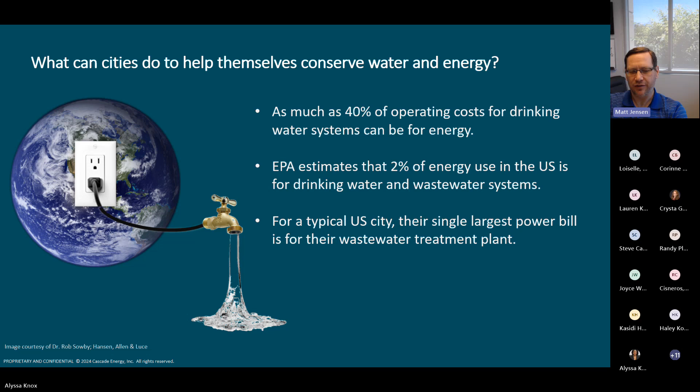So go ahead, Alyssa. So unaccounted water. Unaccounted water is water that you produce for your water system, but when you add up all the water delivered to your residents and their businesses, there's a difference, and that difference is unaccounted water. So when the fire department does testing on your hydrants, that's unaccounted water. That water doesn't end up being paid for by residents.

When you do routine line flushing, or sometimes cities have bulk water sales for construction or for dust reduction type things, and sometimes those bulk water sales are managed without metering the connection. And then I do come across a not insignificant number of cities that don't meter the water they use for city landscaping and parks. But typically unaccounted water, when we talk about that, we're talking about leaks.

This is an example I just pulled off the internet of a leak. I do not have rights to share that image, so hopefully there won't be any repercussions from that. It was a massive leak, obviously, and this is one that wherever this is they would respond to. In addition to large leaks like this that surface and your crews go out and fix, there are thousands of leaks of smaller magnitude that don't get reported. They don't surface. They just end up going into the water table, and you never know or see.

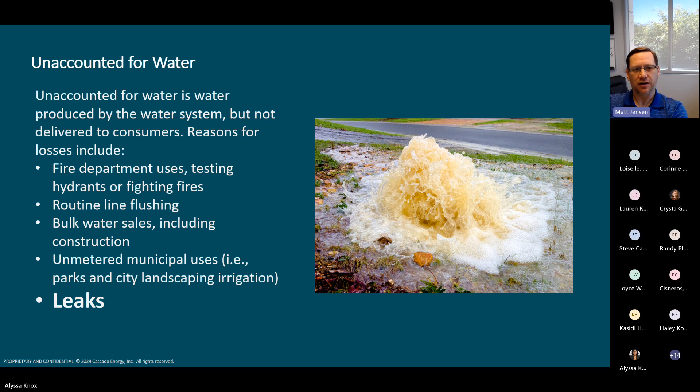And every system in Texas reports to the state every year about their unaccounted water percentage. I went and found the website where that resides. I spent way too much time compiling data, but once I got started, I couldn't stop. So on the next slide is a breakdown of the self-reported unaccounted water percentage for the cities only. I didn't include the water agencies, just the municipal cities that have reported to the state.

These are the percentages. The best I saw was a 2.5% unaccounted water percentage. The worst was just under 44%. That's a pretty big number. But mostly you were distributed between 8 and 12%, or 8 and 14%, was where the breakdown was. Now these numbers are very dependent upon the accuracy of your flow meters.

Leaks happen, and they're always going to happen. When I see numbers around the 2.5% mark, I typically think that's probably a reporting error. Most systems aren't going to get that good, but that 8, 9, 10% range, that's kind of the sweet spot. That's what I think a reasonable system that's staying on top of this can achieve. And if you don't know what your unaccounted water percentage number is, then you should do a little digging. Talk to your public works director or whoever's submitting that number to the state, find out what your number is for your city, and then see what you can do to make it better, if possible.

I'm certainly not advocating for any of them, but there are third-party companies that will come out and, using listening, will help find leaks and help quantify what those might be. I know there's some satellite usage now that looks for chlorine residuals in water that's just under the surface, and that can help point to where there might be leaks. But regardless, I think the important message here is that water loss is energy loss.

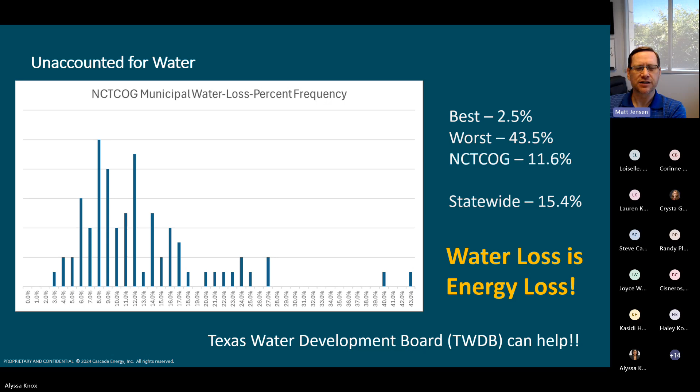I guess Q&A is at the end, so we'll move on with other stuff around this.

But the other side to losses, to leaks, has to do with your water pressure. So this is the same pipe. Obviously, one is at high pressure and one is at almost no pressure. You can see a little bit of water trickling out there in the picture on the right, but it's the same cut. And so for water systems, typically there's a sweet spot in the pressure that arrives at your residents' homes, somewhere between 45 psi on the low end and up to about 100 psi on the high end.

The higher your pressure is in your system, the more water is lost when you do have leaks. And I've seen systems where the pressure is substantially higher, like up into the 150, 200 range. And that can be not only dangerous to your crews and to your residents, but it results in a whole lot of losses when leaks do occur. You get more leaks, and when leaks do happen, you lose more water.

I've got a case study. This is a city in Utah that we worked with. I live in Utah. This is actually the city. Go ahead and advance this if you would, please.

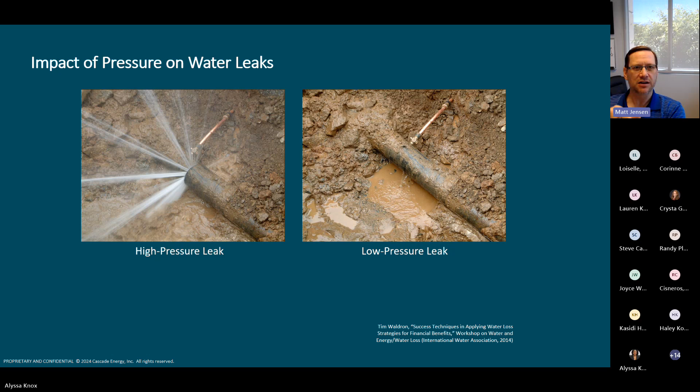Logan City, they've given us permission to share their story. Logan is where my grandma and my mom grew up. My grandma had a house there, and it's where Utah State University is. They've got a number of deep wells. They've got a spring, and I thought they treated water coming out of the canyon as well, but maybe not.

Anyway, regardless, they approached our partners, our aqua efficiency partners. They were looking for another transmission main because they were having a hard time. Go ahead and advance one. In the summertime, they were having a hard time staying on top of water. Their wells are in the bottom of the valley. Their terminal tank is up on the hillside above Utah State.

If I didn't have kind of the picture blocked out in the back, you might be able to see it on the hillside. Right about behind the word main line is where that terminal reservoir is. They're having a hard time keeping that terminal reservoir in the summer, so they thought, well, we need another main line from where our wells are up to the hill. They were having substantial main breaks, over 300 per year, high pressure.

At my grandma's house growing up as a kid, I had to have someone else fill a glass of water for me because the water came out of the faucet so intensely that it would knock the glass out of my hand. And taking a shower at grandma's house was an experience. It was really intense. So they reached out to our partners, and the partners said, well, let's do some analysis of your system before you throw the cost into putting a main line in. So let's advance one more.

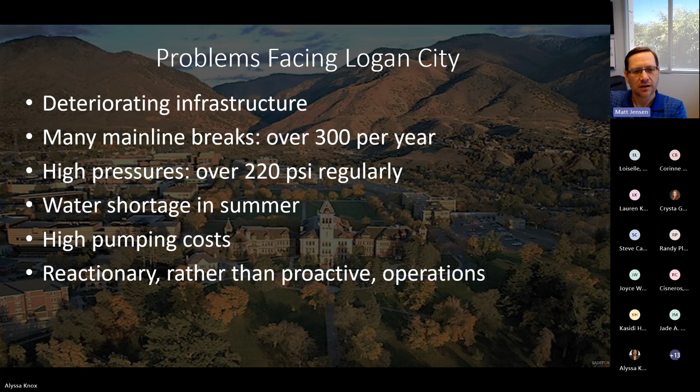This next slide is a hydraulic model that you're looking at. It shows all the nodes in their system. And there's that kind of red dot right there that's flashing. That's one of their wells that they would use to fill the terminal tank, which is represented by the T up on the hillside on your right. They thought when they turned that pump on, the water would go up that direct line straight to the terminal.

But when we did a simulation in their hydraulic model of where the water was going, what they found was the water wasn't going uphill at all. There were demands in the system below, and it was getting pulled downhill, and that was part of what the problem was. And so the solution they ended up doing in Logan, if you advance one slide, is they split their water system into two pressure zones, about where that purple line is. And they created a higher pressure zone and a lower pressure zone.

The lower pressure zone now is closer to that 45 psi to 100 psi range, and the hillside is also about that 45 to 100 psi range. And so now when they turn that well on, which we did simulate, the water actually goes uphill because the water is staying in the zone where it's intended.

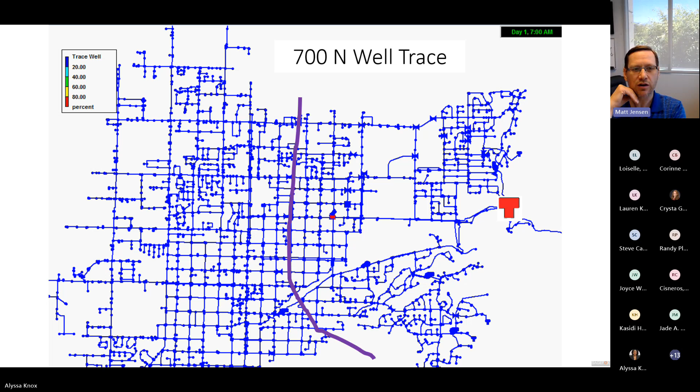And so if you're a system that's mostly flat... if you've got a hilly system, you're probably already on top of multiple pressure zones. But if you have complaints from residents that when they turn the water on, it comes out intensely, or they've got regulators in the house failing, you might have a situation where you have high pressures, and that might be something to look at. But let's advance a slide and we'll see the result from them.

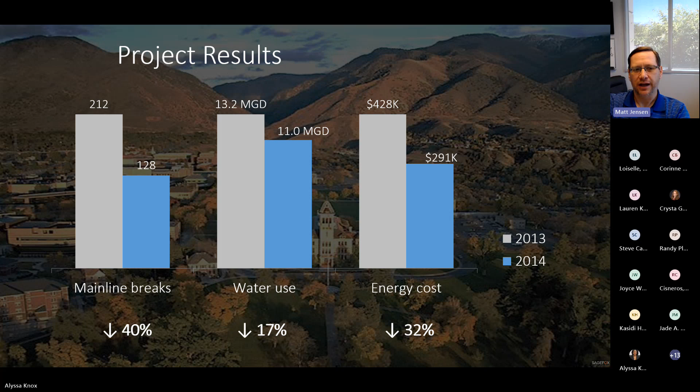Even though this was not an energy or water saving project, it was a water delivery project, they found that after they divided the pressure zones, their main breaks dropped by 40%. The water use in their overall system dropped by 17%, and their energy use dropped by 30%. And that was simply because they were losing less water, they had less pressure, the system was safer. I think there's one more slide on Logan.

Yeah. So less water wasted with less money wasted. They had fewer complaints. It was safer for their crews. This was a handful of years ago. That project would probably have been a $3 million transmission project now. And they postponed the construction of a new water source simply by using their water more smartly.

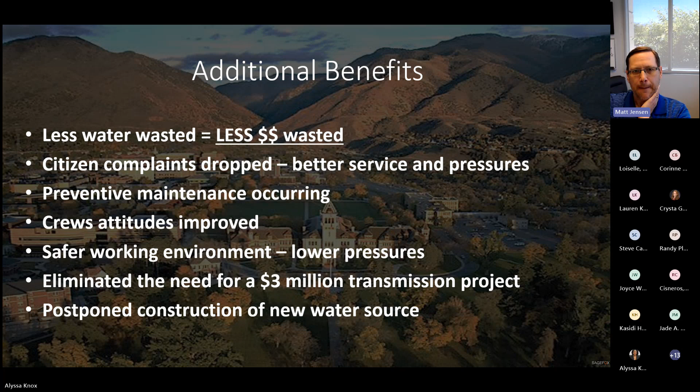Another thing I wanted to talk to you about, and the next slide, is source selection. This is an area of huge opportunity for cities. So maybe you guys can consider in your own systems, how many water sources do you have? How much energy does it take to produce 1 million gallons from each of them? You might in your system have deep wells.

You might have some shallow wells if you're close to a surface water source. You might have treated surface water that you deal with. You might have bulk water that you hire or that you purchase. Each of those is going to have a certain amount of energy embedded in it, or you will be embedding that energy into it to get beneficial use out of it.

And calculating the kilowatt hours per million gallons from each of those sources is a really useful way to make intelligent decisions about how you source your water. And without that information, the question maybe is, how are you currently prioritizing your water sourcing and why?

And I promise you, your operators have favorite water sources. They have favorite wells, they have favorite boosters. I don't know why they pick them, but they do. And without other outside guidance, they're going to use those sources. And sometimes those sources are not the most efficient. So I've got a couple examples for you.

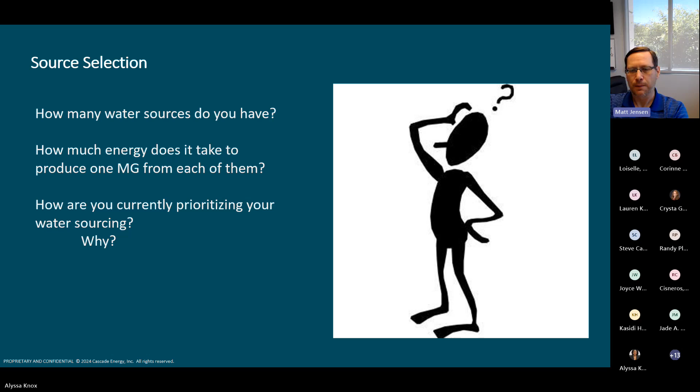This is a wholesale water supplier, Jordan Valley Water Conservancy District. We did this exercise for them, and you can see there that their best water source was their large water treatment plant, Jordan Valley Water Treatment Plant. Compared to their most intensive wells in Carol Way and Solena Way, that's like a 20x difference between their cheapest water source and their most expensive water source.

But some of these most expensive water sources, energy-wise, were their newest wells. They dug these deep new wells. They had shiny, high-efficiency motors, high-efficiency well pumps. But the reality is they had to lift the water a long ways to get it to the surface, to get it to a pressure where they could use it.

Whereas the water flowing into the Jordan Valley Water Treatment Plant mostly came from gravity-fed sources. It mostly fed out of that plant through gravity. It was a very efficient water source. It was a surface water treatment plant. And so they hadn't really considered the ramifications of that.

But once we showed them these numbers, they shifted their water production largely to their two water treatment plants and away from their wells, and they reduced their energy use by 19% in the first 2 years, which is a huge benefit. And these are comments from them. We had them in quotes, so presumably someone on their group said it.

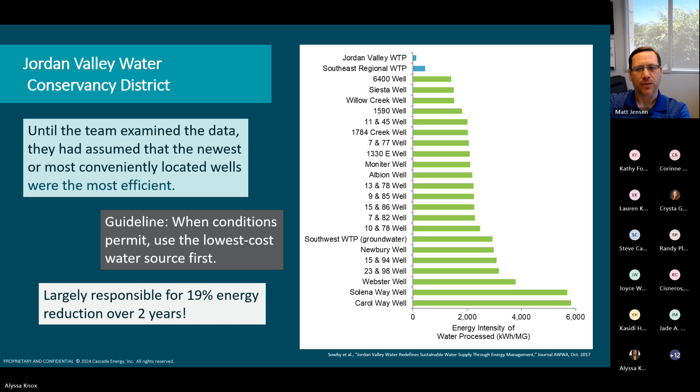Let's go to the next one. Alyssa mentioned we've been working with San Antonio. This is SAWS. This chart is going to show up in their energy strategy master plan. It was presented at the first month of this year, and it was approved by their board. It is public record, but because it's not available on a website yet, I kind of blocked that out. If you squint, you can probably make out the words, but these are real numbers from them.

We did this exercise for them; they've got 9 water portfolios. The Edwards is the Edwards Aquifer. That's where most of their infrastructure is. And they've been spending a lot of money diversifying their water source, because the Edwards Aquifer is in a drought situation right now. The water's not available, and San Antonio's made agreements that they will reduce their dependence on Edwards first, so that other communities can use it longer.

But you can see that on an energy intensity basis only, it is much less than their most intensive sources and better than any other source. And then when you consider their infrastructure investment as a sunk cost, and you just look at the dollar cost per million gallons, it is hands down their best source.

So this raised a lot of eyebrows when we presented this to San Antonio's operating groups, because they had been really working on trying to bring in these other sources, and they'd committed to large amounts of water from some of these more energy intensive sources. And in many cases, there's not a lot of flexibility on what they can do, but at least now they know the numbers. They can make decisions on how they source their water.

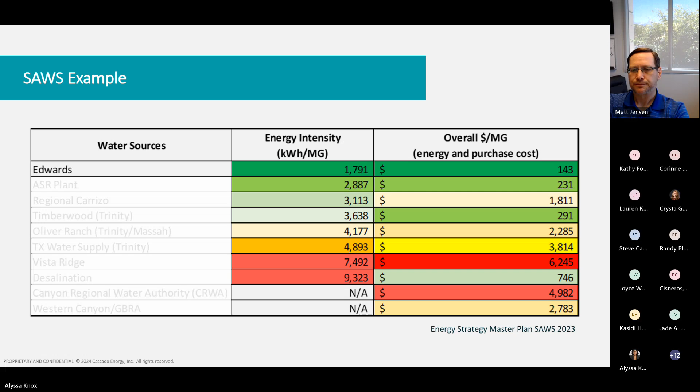And when they get to the slow times of year for demand, they can try to use the sources that will require the least amount of energy and the least amount of money. I've got two more examples. One's from Yakima, Washington. The other one is North Salt Lake. Alyssa mentioned that I was on the city council. That's where I was on the city council, is North Salt Lake.

So this first one, those animations go fast, but there were some animations that would lead into this slower. But anyway, this is a Nob Hill Water Association. They gave us permission as well to share this. They source their water from Zone 3. Well, they've got wells in Zone 1 also, but one of their best wells is in Zone 3, and they source more water in the Zone 3 pressure zone than they can use.

So what they had been doing was lowering all the water down into Zone 1 and then boosting it into Zone 2. And the reason they did that is because they wanted to be able to adjust the levels in the water tank in Zone 2 and make sure that the water age didn't get too old, that they had good chlorine residuals. But that meant that every drop of water that went into Zone 2, they had to boost, whereas they could have gravity fed it from Zone 3 because they had a valve already, the valve on the left, but it wasn't a smart valve. They couldn't control the flow.

Anyway, they ended up tweaking that valve to get part of the flow through that valve, and part of it they still boost, but they've got a long-term plan now to put a control valve, which I've indicated on the right, that they can actually open and close to simulate what they're getting from their booster pump and still make sure they have fresh, good water in Zone 2, but not have to boost it from Zone 1. This, in addition to a focus on reducing their overall leaks, saved them about 10% of their energy use on an annual basis.

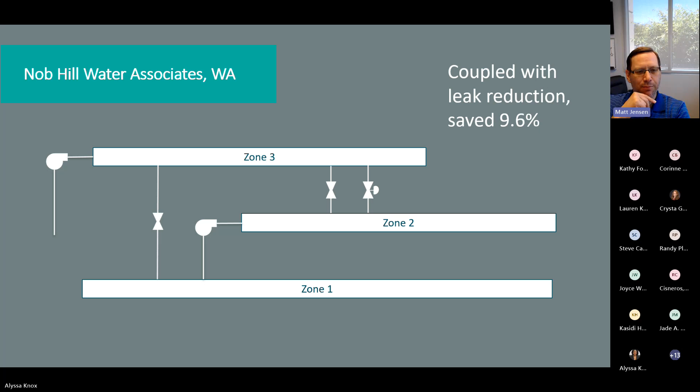That booster station sits on our golf course because, of course, why wouldn't you build a golf course on the top of a hill where it takes the most amount of energy to produce the water? But that's what we did. And in Utah, people want their houses where there's beautiful views. So up around this golf course are these big mansions. And in order to get the water up to there, there's multiple booster stations. We have to boost the water up multiple times to get to those tanks as a city.

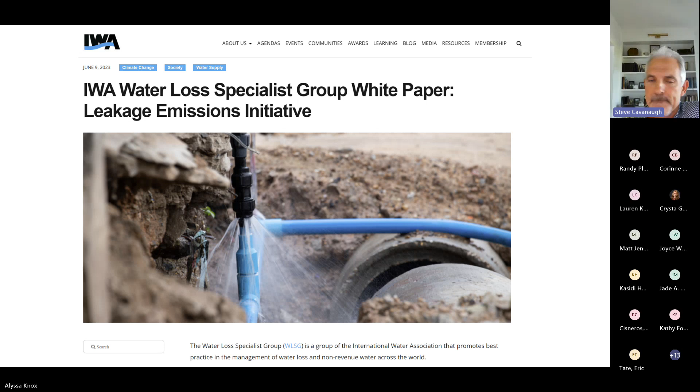Next slide. So to give a little of the background, the math that goes behind it is fairly simple, and that is how dirty is our energy source that's coming into the water distribution system. So Matt talked about the amount of energy going into each individual distribution system and the sources. He also mentioned looking at those sources of energy from a cost standpoint, but there also are really sources of fuel supply.

So as an example, if a utility is a combined cycle facility, they may use coal and natural gas. Those are all carbon intense, have a lot of carbon intensity associated with that energy, the production of that electricity that the water utility is using. So we need to know really how dirty is the energy source in terms of grams of CO2 per kilowatt hour. The next thing is how much energy does the utility use to deliver the annual water production?

So obviously we need to know through a water balance, and I'll describe that in detail in just a moment, how much water we're producing on an annual basis, but also the energy that it took to produce that distributed water. So this is the extraction, this is the treatment, this is the delivery into the distribution system. And that's in terms of kilowatt hours per million gallons. In some cases, that's a compilation from a bill, and you know what the cost per kilowatt hour is on a monthly basis and being able to tabulate those together.

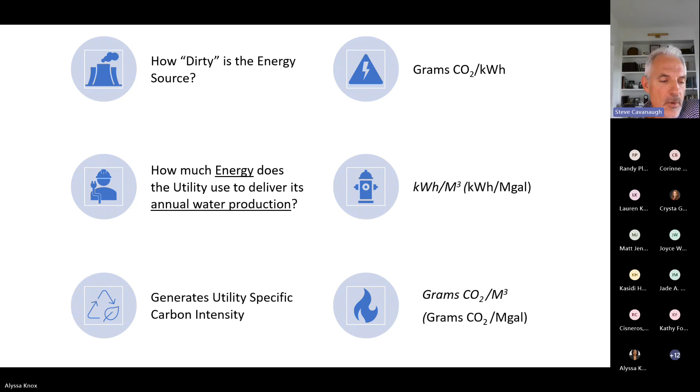Next slide. So this is an example of a resource where you can get energy information. This is carbon intensity associated with the energy that the water utility is actually using or importing into their utility system. So in this case, I think this is Indianapolis. So 555 grams of CO2 for every kilowatt hour that's produced.

And these maps, this is electricitymaps.com, but there's also eGrid that's available on a number of energy sources. And the utility companies themselves are now very, very carefully reporting based on their supply. If, again, it's nuclear, wind, solar, carbon intense, such as fuel source of coal or natural gas, they have these numbers also to be able to share those out there.

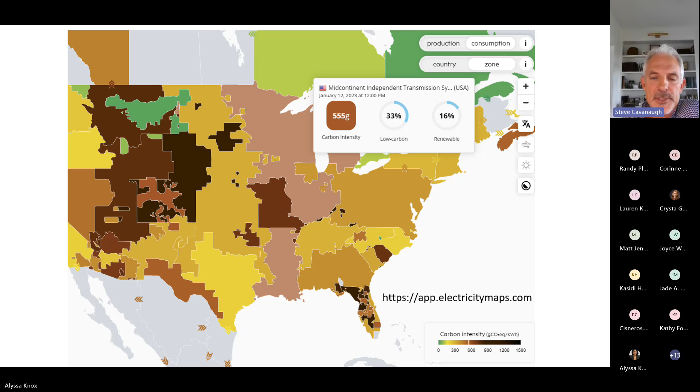Next slide. So this I want to spend a little bit more time on, just based on some of the things that Matt was sharing earlier. And I would say that this is the water balance. And again, just a little bit of a discrepancy. And Texas is moving extremely quickly. There may be some older data that's still on their software that's reported in percentage, but Texas has just passed a validation step where they actually have

John Sutton and Daniel Rice and Mark Mathis at the Water Development Board doing water utility validations of the audits that are being submitted, to actually improve upon the reliability, but also to help educate the water utilities on the best practices of non-revenue water using the water balance. This is a snapshot from the free water audit software from AWWA, and the Texas Water Development Board is in the process of reformulating their online portal to actually mirror this and also include the validation numbers as well.

But the way you read this is we have our total system input volume, and that's from either own sources. So this may be from a river where we're taking the water, or we may be buying water from somewhere else, or a well system that would be volume from own sources. Those two combined together give us our total system input volume. And if you see, those two columns add up to equal the total system input volume.

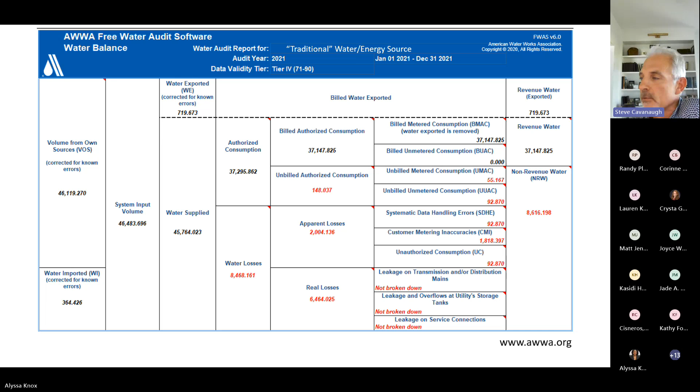But if we take our water supplied minus authorized consumption minus apparent losses, again, the largest portion of apparent losses is through customer metering inaccuracy errors in our metering, then that gives us leakage. But we need to go a step further. So I want to go next slide if we could, and say that that's not where it stops.

And now I'm going to bridge this back to the leakage emissions initiative and say, now we have gone through the water balance, we've done the water audit, and we've got what we call a top-down indication of real loss or leakage in our distribution system. And this matches up to what Matt was saying of what can be controlled by pressure, what we can intervene with, actually reducing the awareness, locate, and repair time.

And we have different strategies, but now we have our water balance real loss, if you see by example on the top, and I'm showing how it comes from the balance to what's called a leakage component analysis. So that leakage component analysis further breaks down the leakage.

And we say, okay, we know the leaks that for a year we go and interact with and repair, and we're making estimates of; those are what is known as reported leakage. So that is the leakage that we have discovered, we've repaired, we know about out in the distribution system.

On the other side of this chart, we have background leakage. This is leakage that is not detectable. These are the weeps and seeps. This is our technical minimum, if you will, in the distribution system based on, as Matt said, the system operating pressure, the infrastructure condition factor, the miles of main that we have, the number of service connections. So that's a technical minimum that, unless we change pressure or we change the asset itself, dig up and make asset rehabilitation or a new line, we're not going to change.

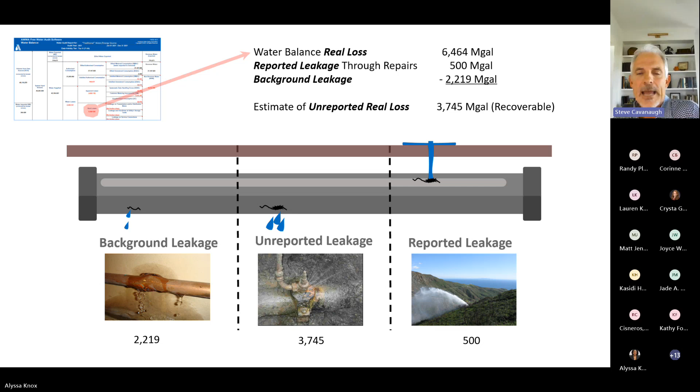And we're also not going to be able to detect it in the distribution system. What we can detect and build leakage reduction projects on is the unreported leakage. And so by example, in getting this to the carbon tie, this is a standard process utilities go through. They do the water balance, which gives us a top down, and now we build bottom up by breaking down that leakage: how much is reported, how much is background, which is calculable, and then to get to our unreported leakage. So in this example, we've got 3,700 million gallons of recoverable leakage. Okay, next slide.

So back to the water balance and thinking about the math in the leakage emissions initiative. It's important that we do this on the entire system, and we do it as a validated water audit and balance itself. The green boxes here are taking that utility-specific carbon intensity, the number of grams of CO2 per million gallons, and we're applying that to the water balance uniformly. So that's for our system for our audit year looking in reverse.

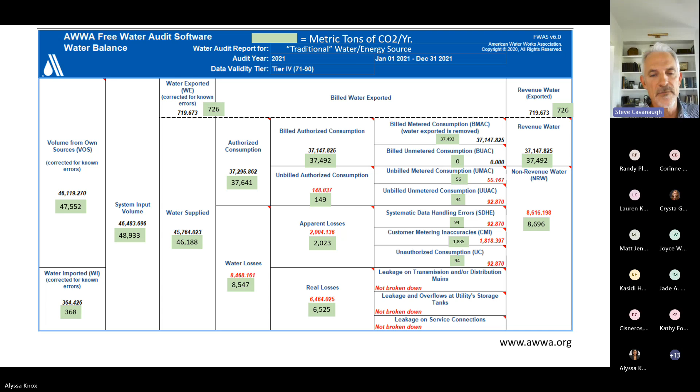So we now have the end of 2021, we've got 12 months of data. We're able to do the water balance, which we're showing here. We do the water audit itself. We've now broken down each of our components. And we see that we have a total real loss of 6,525 tons of leakage. Next slide.

So back to our example, if we now are doing a leakage reduction project, we've gone through the component analysis. We've said, okay, we're going to attack the unreported leakage in our distribution system, which is 3,700 million gallons. Well, that equals 3,780 metric tons based on that utility-specific carbon intensity. So now you can just think about it. The original initiative was in Prague to try to make this tie.

And if we can show that by reducing leakage, which we should be reducing anyway, but in some cases it's financial, in some cases it's priorities. But now if we can say, hey, not only are we reducing leakage, but we're also reducing metric tons of carbon in a defensible way, then that might accelerate leakage reduction projects.

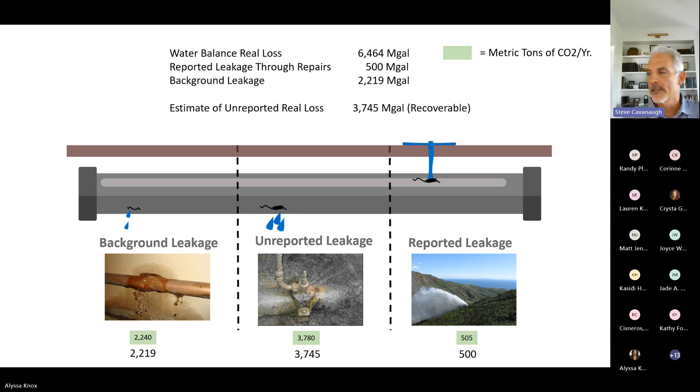Next slide. I've already mentioned this, but last week in Anaheim, we approved the AWWA Leakage Emissions Initiative white paper. We have now joined that with a committee report. This is a sample calculation just to see how the numbers that I just came to work: the volume supplied in the example on the left in imperial units, so 10,000 million gallons per year.

A reference carbon intensity, pulling that from eGrid or electricitymaps.com or the local power provider to the utility, at 540 grams per kilowatt hour. How much energy the utility uses, kilowatt hours per year or megawatts, and then getting to the utility energy intensity, to get to our utility carbon intensity, to get to the number of grams per million gallons.

Now we're doing a leakage reduction project. In this case, it's 1,450 million gallons, or 1.4 billion. We have a carbon reduction that is calculable, as shared earlier, the number of grams per year to get to the number of metric tons.

So on the leakage emissions website, I'll put a link up there, but the carbon calculator is there, the white paper, all of the background reference material, and you can go there and be able to do the carbon calculation on your own. Next slide.

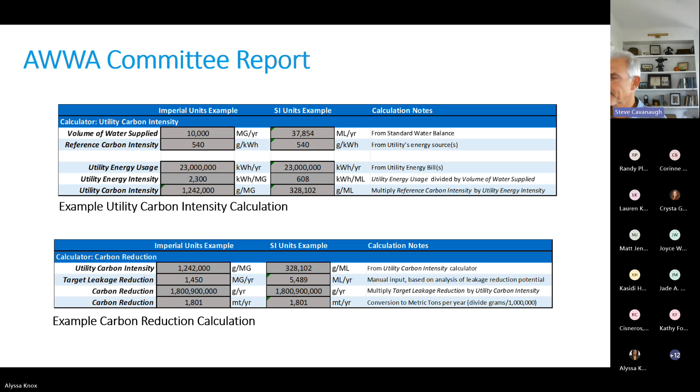So when the initiative started, in at least the early stages, we talked about the creation of a carbon leakage credit. And the concept was, hey, we have industry out here. We've got BP, Shell, Nestle, who are out here buying carbon credits because they have an activity that has a carbon intensity of, let's just say, 50. So their activity is at 50. Well, if they can invest in projects that are minus 250, that are actually reducing the carbon, that helps that individual multinational company get to their carbon neutrality goals.

So we think that this could still be a strategy, and the concept would be, well, hey, now BP would come to Austin, Texas and say, I want to buy your leakage rights. If you'll guarantee for me that if I fund it, you'll then reduce the leakage, then I can help monetize that carbon. So to do that, we have to have it go through a registry, Gold Standard, Verra, CAR, several of them out there. And what we've seen is a real reluctance for any new carbon trading market or carbon verification.

And there's also what's called additionality, where there's a concern that, hey, why should we be rewarding and creating this carbon credit, leakage credit market when utilities should have done that in the first place? Our pivot and pushback has always been, for years, utilities know they should be reducing leakage, but if we can now help to drive that by putting finance in, then we shouldn't be penalized. So we're still working on developing the carbon leakage credit. But the next slide, if you could.

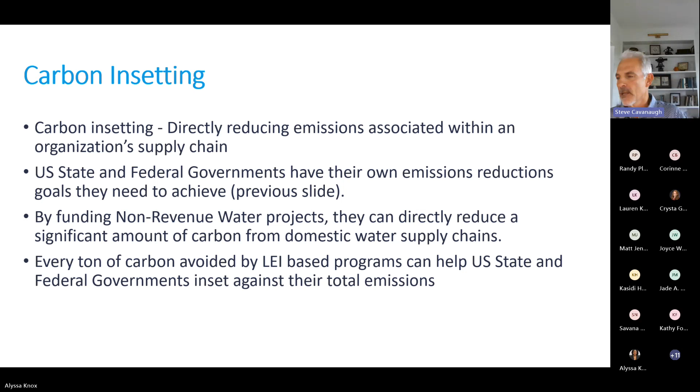Last thing I'll do, and then I'll open for questions. Next slide, please, is talking about the horizon. I mentioned the verification bodies, Gold Standard, Verra, CAR, as bodies out there. The links that I'll drop in the chat here in just a bit.

There's a case studies tab that shows New Jersey American Water, 2 utilities in Jamaica, 1 in South Africa, and they're coming every day, bringing forward to, in essence, show we have already, because of our past work of reducing leakage, we've already reduced this many metric tons. The importance of posting those up is to help attract additional funding and to be able to see that the projects actually are indeed reducing metric tons of carbon. Educating global financial institutions on this concept of nationally determined contributions.

So some current concerns: we think that we can make the case that if you did not interact with that leakage, it was going to continue to leak. That's a physical fact. And not only is it going to leak, but those leaks are going to get larger. There's a rate of rise of leakage in every distribution based on the physics. So we're trying to work through the horizon at which we could count that.

And then what about new leakage after a reduction project? You see this often, where you repair a leak and then there's attenuation of pressure. You now have given the opportunity that it was escaping, so the pressure was dropping. Now you've actually created leaks. What happens, and how do we account for that, and how do we track that?

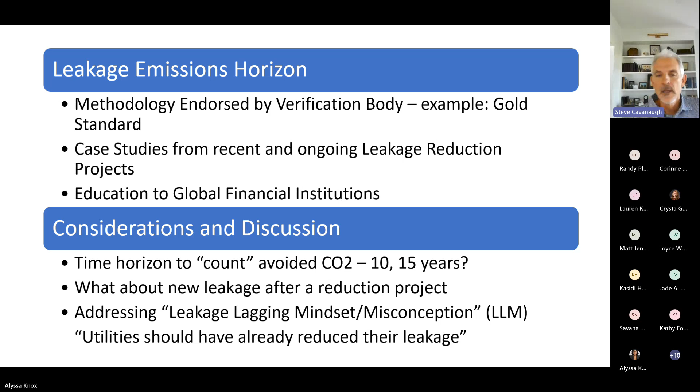Hopefully I've clarified the water balance, this kind of unaccounted for that's still pervasive out there, why we don't use a percentage basis, and then also the carbon associated with leakage.

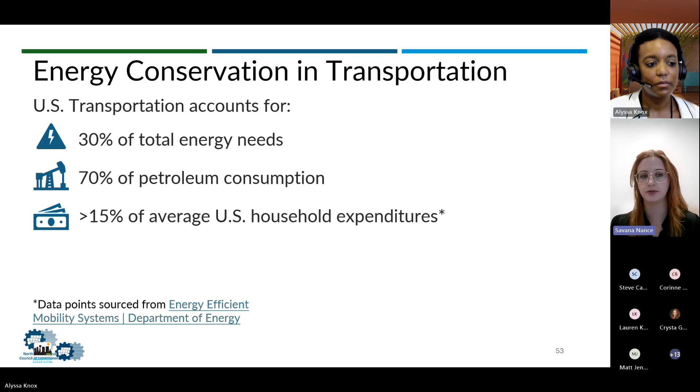And Alyssa, if you'll go to the next slide, one of the ways that we see an opportunity to reduce energy consumption is using more fuel efficient vehicles. So there can be various ways to do that. That could be purchasing newer vehicles, not idling your vehicles, etc.

But another opportunity is to use alternative fuel vehicles, which oftentimes can be more energy efficient than a conventional diesel or gasoline. And that is primarily because of the necessity to convert diesel and gasoline fuel for it to be utilized by a car, where electricity can directly just be consumed by the vehicle to propel itself, at least in battery electric versions.

So if you're someone that's interested, my team, the Clean Fuels and Energy team at the North Central Texas Council of Governments in our transportation department, we are the people to talk to about all things alternative fuel vehicle related, whether light, medium, or heavy duty. And I can put a link in the chat where you can go to our website if you're interested in learning more.

But one thing that we are planning to do is ask for some funding from the Environmental Protection Agency for the EPA's Clean Heavy Duty Vehicles Grant Program. There is $932 million available in this program for the replacement of Class 6 and 7 vehicles. So that could be refuse trucks, utility trucks, those heavier duty vehicles with zero emission versions. So that could be hydrogen fuel cell, if you all are familiar with that, or electric vehicles.

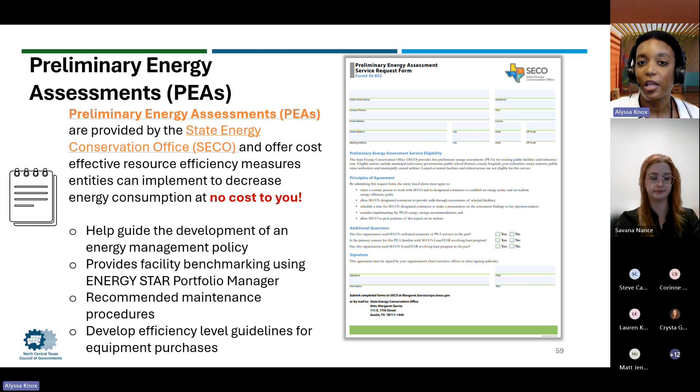Specifically, the PEAs are available at no cost to local governments through SECO, and this will help guide and set benchmarks for the energy use already happening, and then help local governments create better benchmarks going forward and energy efficiency guidelines. And then, as I said earlier, SECO offers no-cost technical assistance for energy or water-related technical matters. So even if you are a local government, if you are a water utility, please know that that is also available to you to provide support.